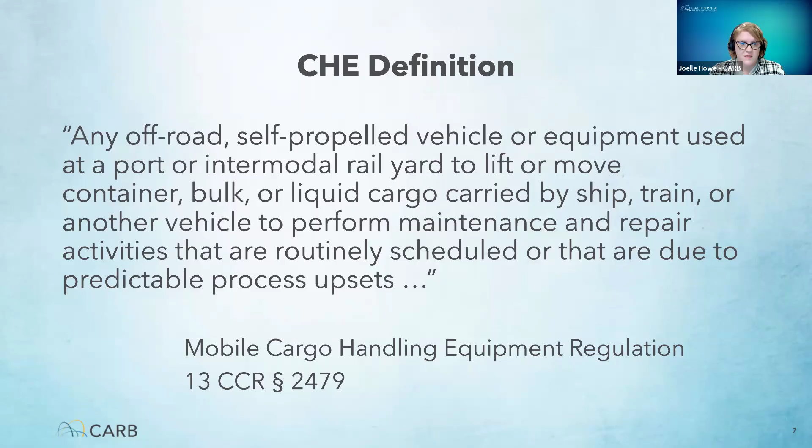When we talk about CHE, we are using the definition from our current regulation. In plain terms, CHE is off-road, self-propelled equipment that is used at a seaport or intermodal rail yard, and those are what we'll call facilities today. It is used to lift or move cargo, whether that's containers, bulk, or liquid, or to carry out routine maintenance and repair work. As you know, this covers a pretty wide range of equipment, from yard trucks and cranes to utility trucks and aerial lifts. Next slide.

The Mobile Cargo Handling Equipment Regulation, which CARB adopted in 2005 and amended in 2011, has significantly reduced emissions from diesel-powered CHE. It requires engines to meet particulate matter, or PM, and NOx limits. And this has driven real progress, especially as older engines must be replaced with cleaner models. The regulation has been effective, but it was not designed with zero-emission equipment in mind. So where does this leave us today?

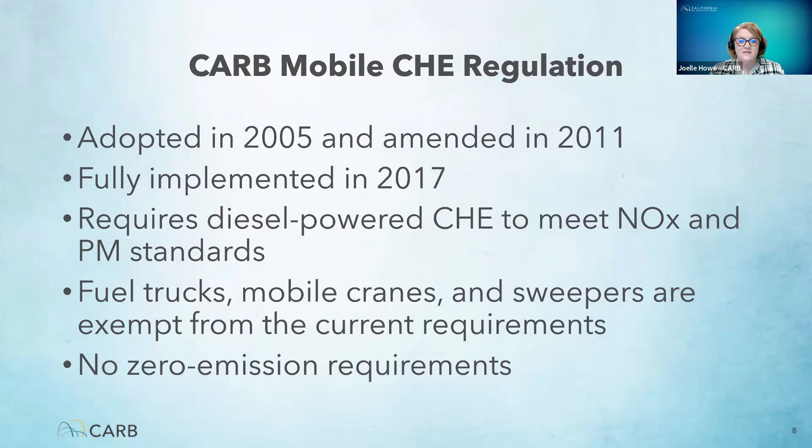Next slide. Let's dig into the emissions profile of the sector. Based on CARB's 2022 CHE emissions inventory, today there are over 5,000 pieces of cargo handling equipment operating at seaports and intermodal rail yards across the state. The largest concentrations of those are at the ports of Long Beach, Los Angeles, and Oakland. And most of this equipment across the state is still diesel powered. And the number of CHE is expected to double by 2050, which makes understanding the sector and planning for its future even more important.

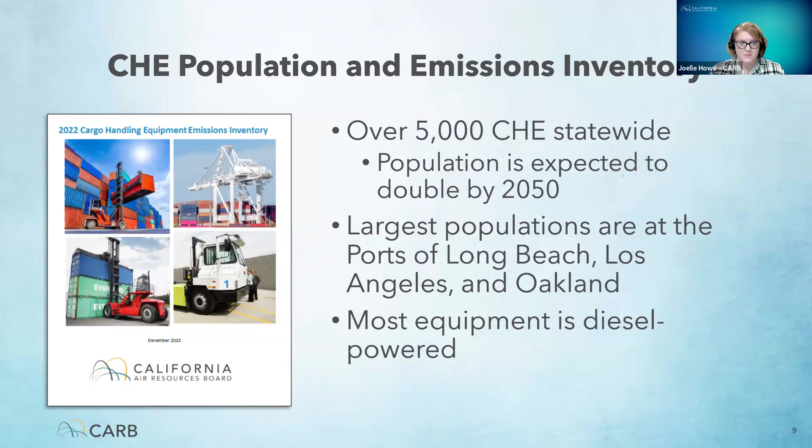Next slide. This graph shows projected statewide PM 2.5 and NOx emissions from CHE through 2050. Thanks to the current regulation and natural turnover, emissions are expected to decline for the next decade. But without zero-emission equipment, progress stalls. Emissions eventually level off even with full compliance. And that is the key takeaway. We've made real progress, but we're approaching a plateau, and this is where the opportunity lies to go further.

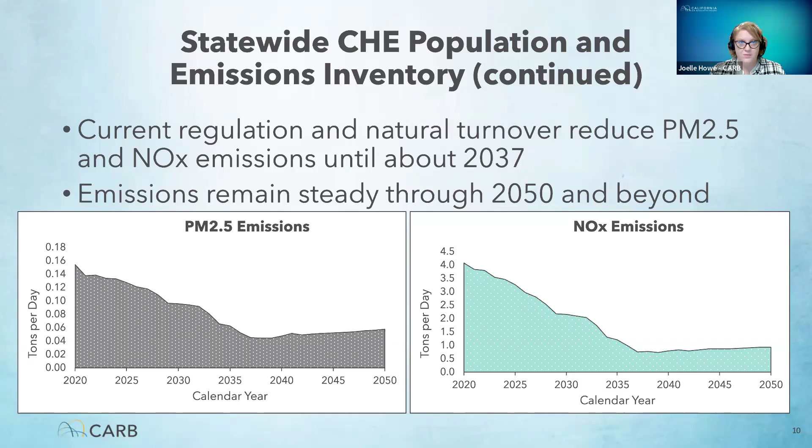Next slide. Okay, now let's move on to the draft technology assessment. As we've already covered on the agenda slide, today's discussion will cover these 4 aspects of the technology assessment. Next slide.

I will start by explaining our purpose of the assessment, how and why we developed it, and how it supports our broader goals at CARB. After that, we will walk you through our approach, findings, and what we learned about the current state of zero-emission technologies.

At CARB, our mission is to protect public health and fight climate change, and cutting freight emissions is a big part of that work. The technology assessment supports this mission by helping California reach its multiple risk reduction and air quality goals. It also supports the Governor's Executive Orders, which call for zero-emission off-road vehicles and equipment by 2035 where feasible.

The assessment evaluates the readiness of zero-emission technologies for CHE, what's on the market now, what's in development, and how these technologies perform in real-world settings. This document is an update to our last CHE technology assessment, published in 2015. It also supports planning and regulatory actions such as the Mobile Source Strategy, State Implementation Plan, Scoping Plan, and funding plans for clean transportation incentives.

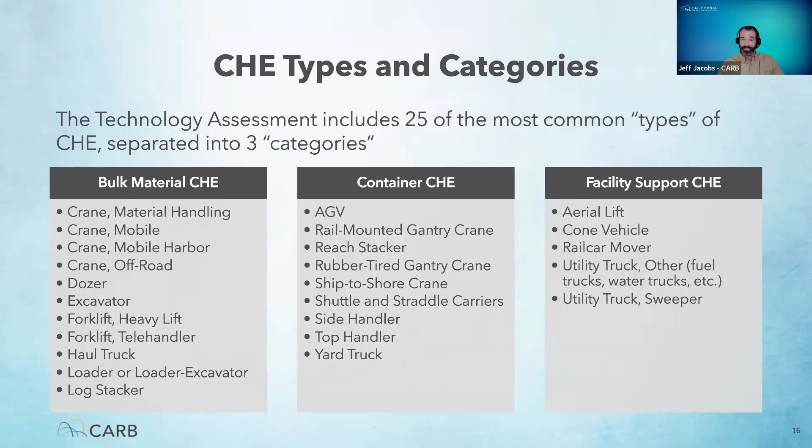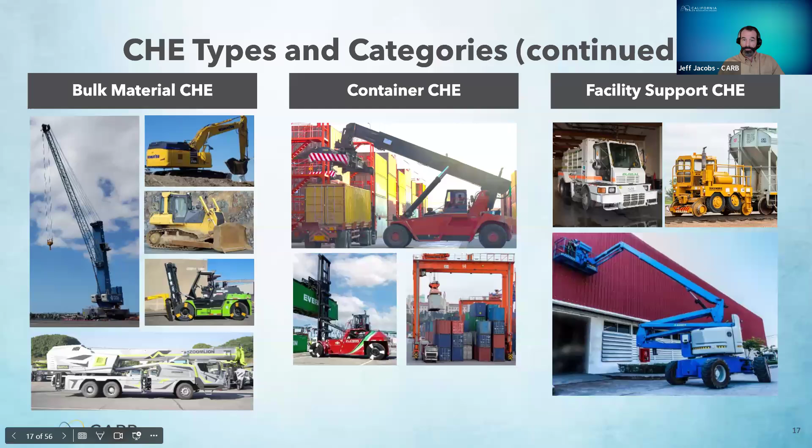For this assessment, staff only looked at zero emissions technologies, those with zero exhaust emissions of any criteria pollutant or precursor pollutant, toxic pollutant, or greenhouse gas under any conditions. This assessment does not include near zero or other advanced technologies that are not considered zero emission. Staff evaluated 3 zero emission CHE technologies: battery electric, grid electric, and hydrogen fuel cell. Note that we use these abbreviations throughout the presentation: ZE for zero emission, BE for battery electric, GE for grid electric, and HFC for hydrogen fuel cell.

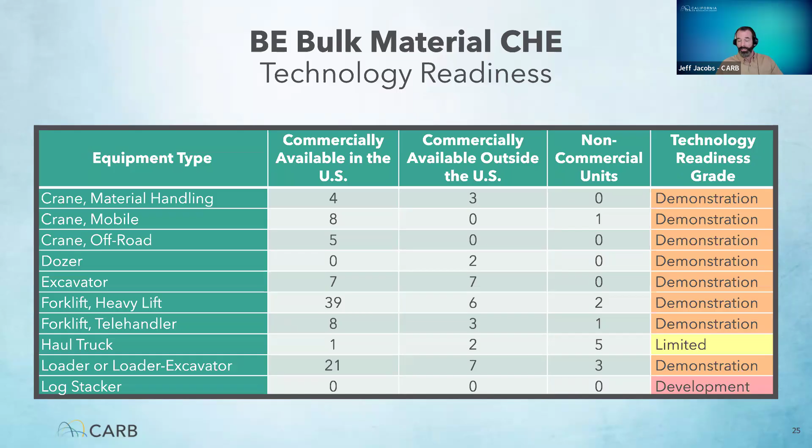This slide provides a summary of the commercially available battery electric bulk material CHE and their technology readiness grades. I'm going to pause here to give a chance to look at the data.

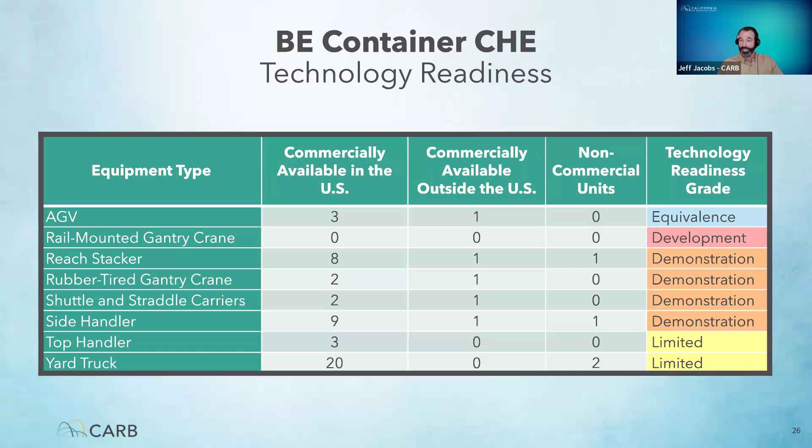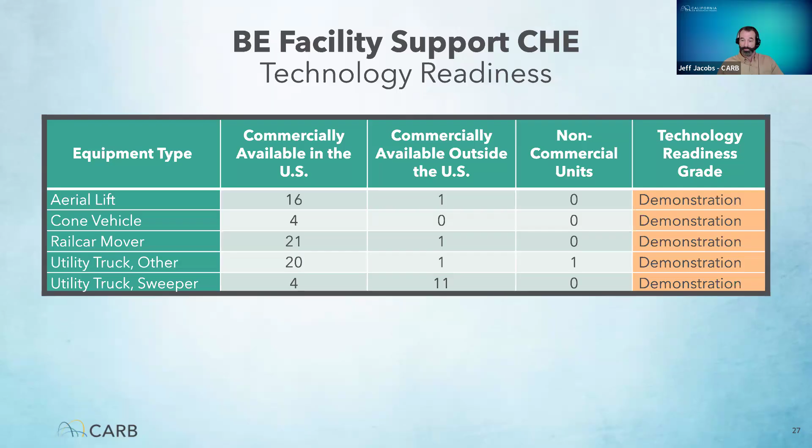Grid electric technology for CHE involves a continuous connection to the utility grid using cables, bus bars, or pantographs. Grid electricity is practical for CHE that is mostly stationary or follows predictable paths, such as ship-to-shore cranes, rail-mounted gantry cranes, or rubber-tired gantry cranes.

Most grid electric CHE still need batteries, but less than is needed for battery electric. Providing a grid connection for moving equipment is challenging and often requires significant infrastructure changes, which in turn require a lot of planning. Dynamic charging from the grid is being investigated for on and off-road vehicles, but is not yet used for CHE.

Some of the benefits of grid electricity for CHE include constant power, which can reduce or eliminate the need for batteries, and can reduce or most likely eliminate the need to charge. Nearly all new ship-to-shore cranes and rail-mounted gantry cranes are grid electric. New wireless dynamic charging technologies for mobile equipment are being developed, and some dynamic wireless charging CHE will soon be tested.

Some of the challenges with grid electricity for CHE include limited mobility, and infrastructure for grid electric CHE can be disruptive during installation, and once installed, it can take up real estate that was used for operations or storage.

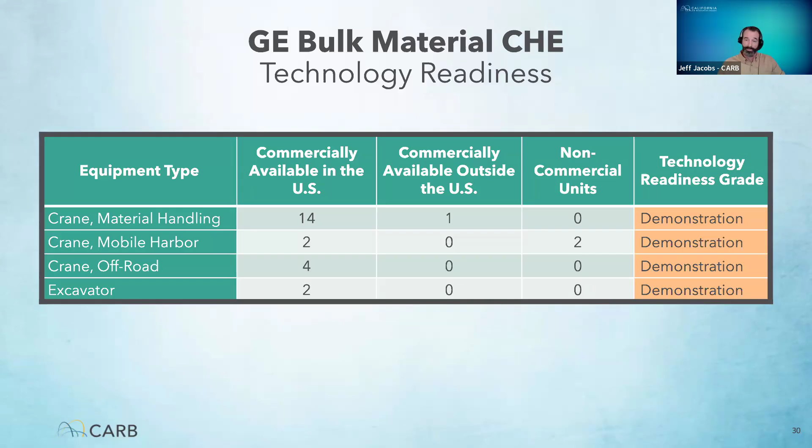I'll mention here that while putting together the assessment, there have been a couple of announcements regarding future demonstrations of dynamic wireless charging for yard trucks. However, as of January 2025, which was our cutoff for data collection, the demonstrations had not been launched.

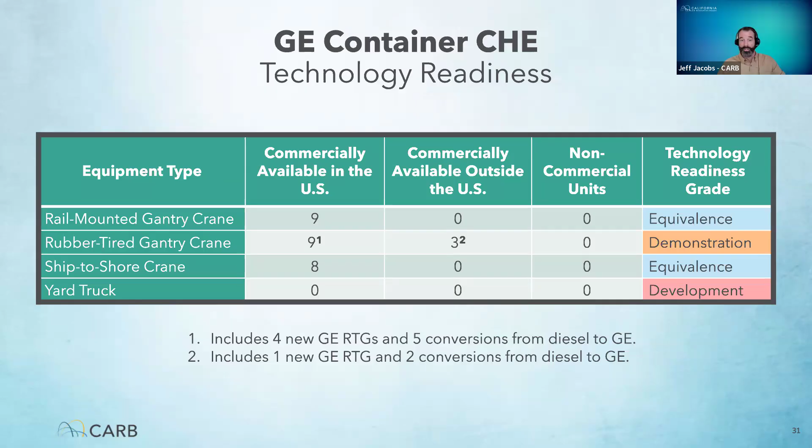Hydrogen fuel cell CHE uses a fuel cell instead of a battery or connection to the grid to operate. A hydrogen fuel cell is similar to a battery but uses hydrogen as a fuel instead of needing to be recharged.

There are many different fuel cell technologies, but polymer electrolyte membrane, or PEM, fuel cells using hydrogen as the fuel are the most common for commercial vehicles, including CHE. Hydrogen fuel cells are a mature technology, but not currently used in many CHE.

Some of the benefits of using hydrogen fuel cells for CHE include the same freedom of mobility as batteries, comparable refueling times for hydrogen fuel cell CHE as with diesel-powered CHE, and reduced battery dependency.

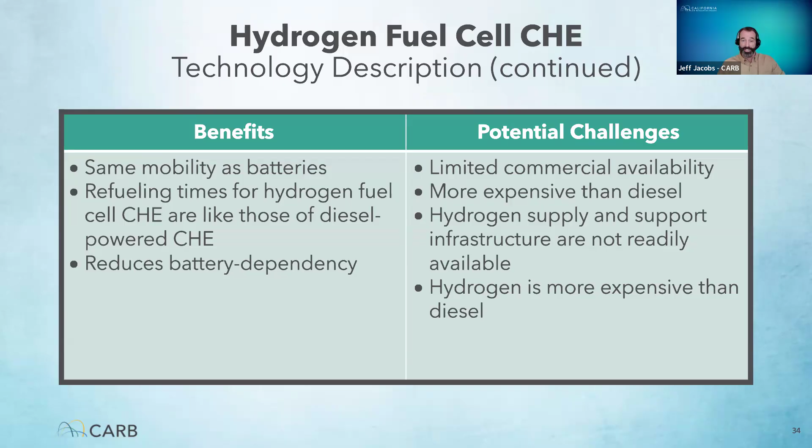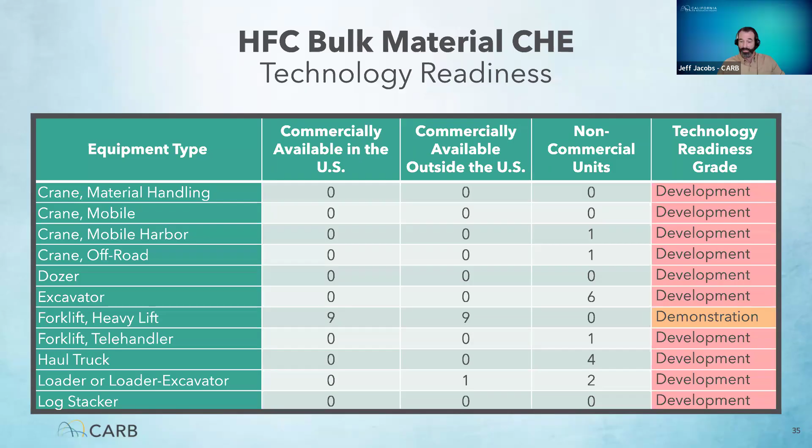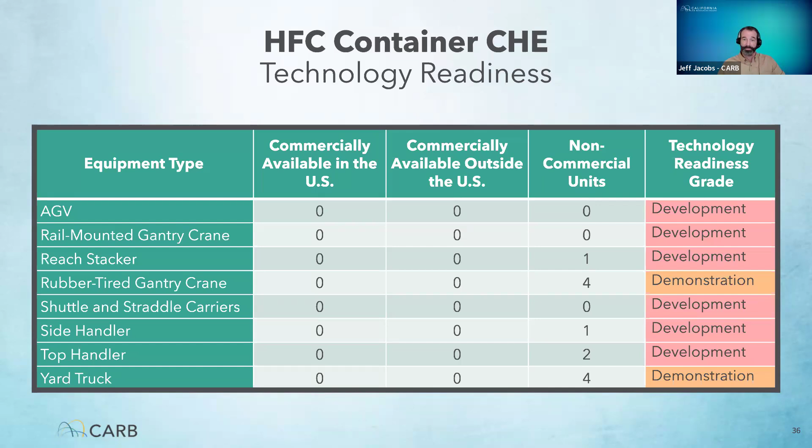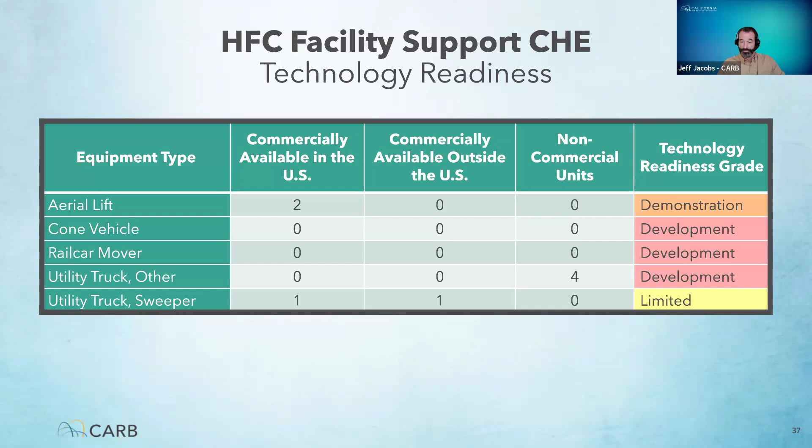For both battery and grid electric CHE, California's electricity comes from nearly 60% renewable sources and is continually getting cleaner, providing a clean source of power. Using grid electric and hydrogen fuel cell CHE can reduce e-waste caused by spent batteries, help avoid charger congestion and unmanaged charging, which we will talk about more in a minute, which in turn helps alleviate stress on the grid. This may help reduce dependence on peaker plants, which are power plants used during peak hours when the regular power generation sources are being stressed. Peaker plants often do not use renewable power generation sources.

Hydrogen can be produced renewably, and hydrogen fuel cell CHE that use hydrogen from renewable sources have the best life cycle emissions profile. However, because hydrogen is such a small molecule, hydrogen leakage is a challenge and has indirect greenhouse gas effects.

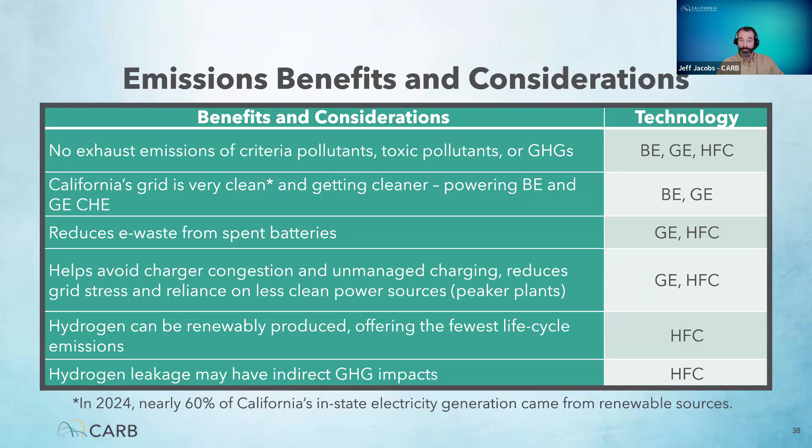But Jeff, we have about 4 questions in the Q&A right now. Okay, if you want to just go down the list, that's probably best. I'll open that up.

The CEC has a grant funding opportunity on the street that requires 3 CHE to charge at each charge point, yet this assessment indicates that battery electric is currently a challenge for even just 2-shift operations. Does ARB envision any practical possibility that CHE at ports could realistically assign 3 units to a single charger and allow 3 units of full operation? This is primarily an infrastructure question, and we'll talk about infrastructure right after we're done with our Q&A right now. We acknowledge that there is this challenge of charging infrastructure. We don't specifically have recommendations on how the ports should charge their equipment. We do talk, and like I said, in a moment, we'll talk more about the infrastructure and the implications of that, but we do not go into detail about how that charging will happen. So we'll address that more, and we'll see if we answer this question in more detail. If not, you can circle back and ask if we don't address your comment.

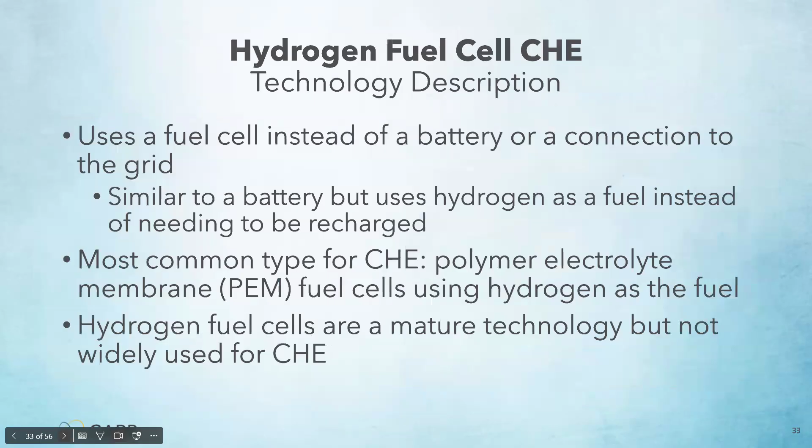All right, and with that, Tianbo will now discuss infrastructure and economics. Next slide, please.

Good morning everyone, my name is Tianbo Tang, and I am an air resources engineer at the California Air Resources Board. It's a pleasure to be here with you today. In this portion of the presentation, I'll cover infrastructure requirements and considerations, infrastructure challenges, and economics associated with battery electric, grid electric, and hydrogen fuel cell CHE.

First, let's look at battery electric and grid electric infrastructure requirements and considerations. We evaluated the infrastructure required to support electric CHE through three key components. First, we looked at the electricity source, including a statewide grid impact analysis, steps of upgrading utility grid infrastructure, and microgrids. Utility grid infrastructure upgrades can include adding more circuits, modifying existing substations, or adding new substations, depending on the needs. Second, we looked at charging equipment requirements and considerations.

Charging stations, along with components like switchgear, all require space, which is limited at seaports and intermodal rail yards. Permitting and certification processes can influence deployment timelines, which need to be considered when starting infrastructure projects. We also assessed charging station requirements and considerations, including DC and AC charging, and commonly used plug configurations and charging standards.

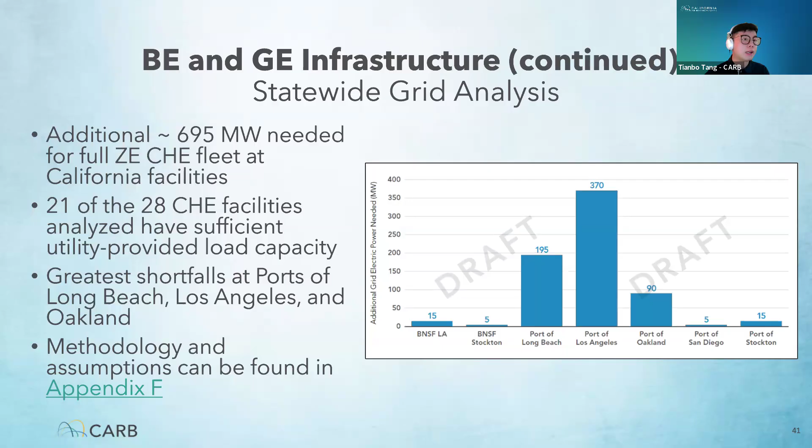Our assessment identified several challenges to deploying electric infrastructure. High costs remain one of the key challenges for infrastructure projects; detailed cost information will be discussed in later slides. Lengthy timelines for planning and constructing electric infrastructure contribute to delays. The permitting process and the need for certification of charging equipment can cause further delays.

Space requirements also pose a challenge. Sufficient space must be allocated for electric infrastructure, which can be difficult in already congested seaport and intermodal rail yard environments. Charging equipment issues, such as availability, reliability, and compatibility, can hinder operations. OEMs may take considerable time to address faulty equipment or provide replacement parts for charging systems, resulting in increased downtime for CHE. Lastly, utility grid reliability affects both performance and equipment lifespan.

Irregularities in the utility grid, like voltage fluctuations and electrical noise, can negatively affect the lifespan and performance of electric equipment.

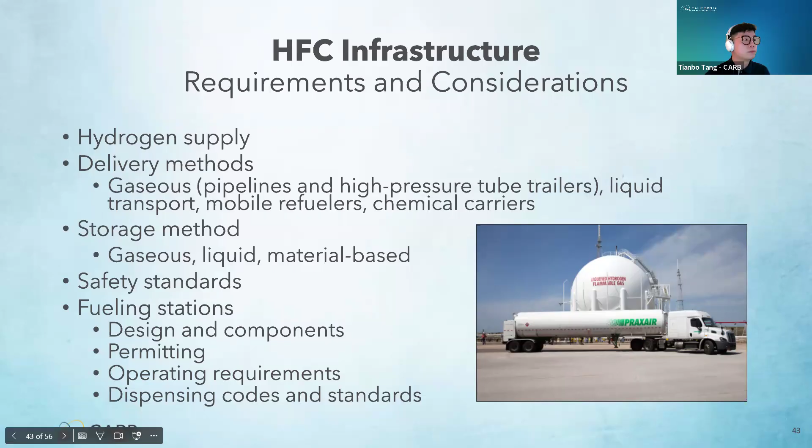Sorry, can you please go one slide back? Yes, permitting remains complex. A standardized process is still under development at the state level, leading to uncertainty and potential delays. Is this slide—can you please go to slide 44? That's where I was at. All right, sorry about that. So yeah, now we're at the second bullet point, which is permitting.

Permitting remains complex, and the third bullet is timelines for hydrogen infrastructure, further slowing development. Technical challenges include hydrogen loss during gaseous and liquid storage, and immature technology for material-based hydrogen storage. Safety remains a key concern. Hydrogen requires rigorous safety measures due to its handling characteristics. Maintaining public and workforce confidence is essential for successful deployment.

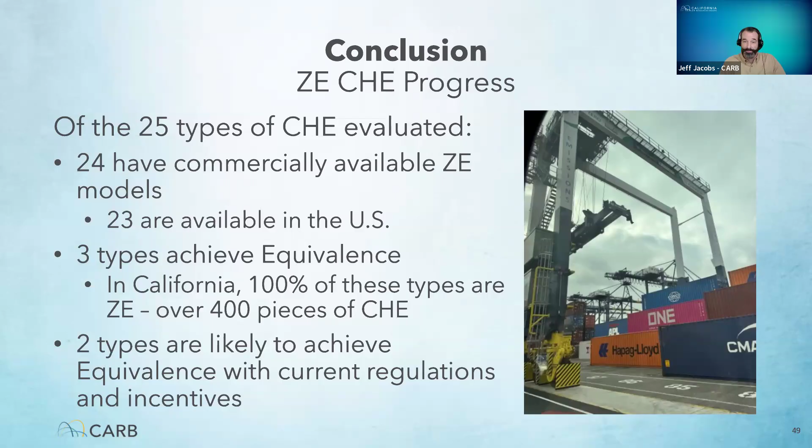Although much progress has been made in the development and adoption of zero-emission CHE, there are still many challenges. Most of the CHE evaluated do not achieve equivalence, and most likely will not achieve it within 10 years without market interventions such as additional emissions reduction strategies or incentive programs. This is based on the technology readiness grades of the CHE, the lack of available infrastructure, and the generally higher cost of zero-emission CHE compared to diesel models.

Infrastructure challenges, high costs, and equipment reliability must be addressed for widespread adoption of zero-emission CHE. While there is a zero-emission solution available for almost every type of CHE, a significant amount of public and private infrastructure is needed to deploy these CHE. Grants, clean air programs, and financial incentives are needed to help fund both the equipment and the infrastructure.